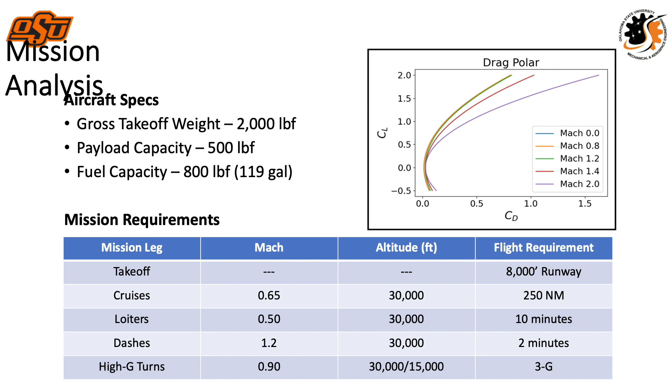To start the design process, certain criteria were pulled from the RFI. This consisted of the gross takeoff weight, payload capacity, fuel capacity, and more. For the mission legs, Mach numbers, altitudes, and durations were given. A drag polar was also assumed to calculate values such as required thrust and fuel burned. The proposed NGAT design was created in the attempt to complete the mission profile, which can be seen here.

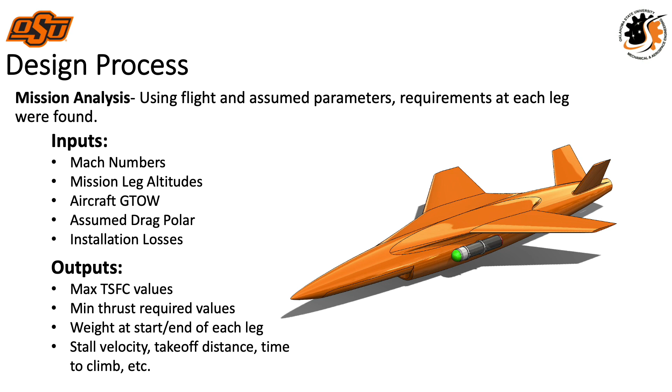To start the design process, a mission analysis was performed. This entailed finding important values for each leg, such as thrust-specific fuel consumption, minimum required thrust, and aircraft weight by using requested flight parameters and an assumed drag polar. A parametric cycle analysis was then used to compare different levels of technology for engines as well as engine design parameters and the figures of merit associated with them.

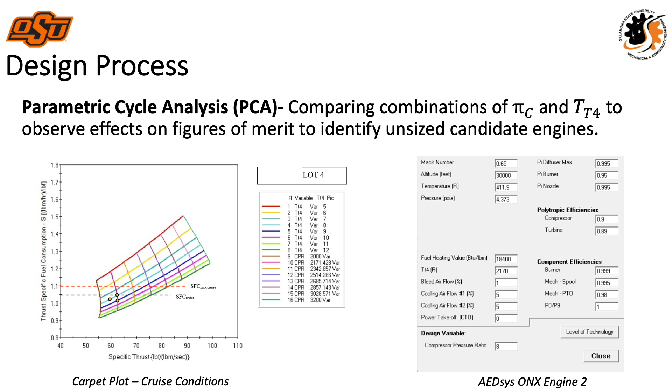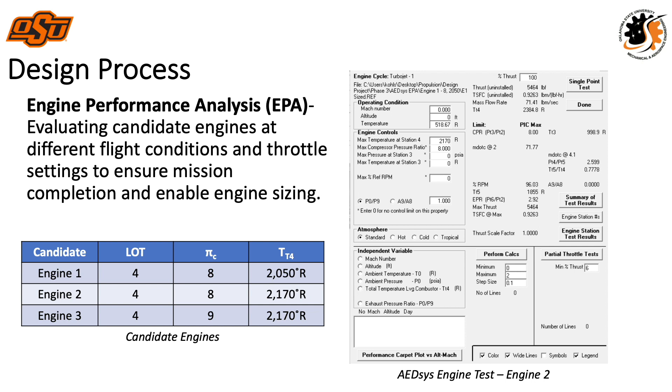By comparing carpet plots at different levels of technology, a level of technology of 4 was chosen, which incorporates modern-day technology. From this PCA and the carpet plot seen here, 3 candidate engines were chosen to move forward with. The design choices of Pi-C and TT4 for candidate engines 1, 2, and 3 from the PCA can be seen in the table here. EPA was used to look at how the candidate engines performed at different flight conditions and throttle settings, as well as to size the engines. The performance of each engine was taken into consideration when choosing the final design.

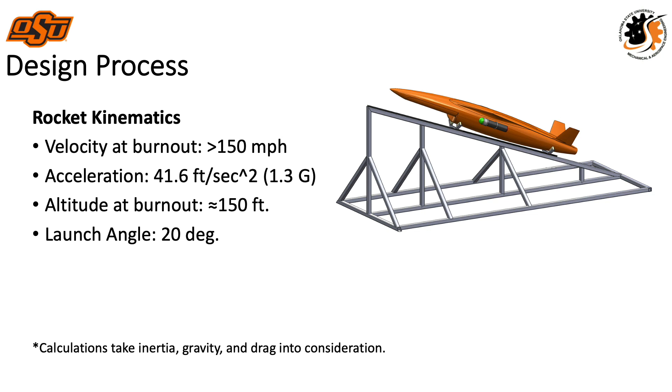Kinematics was used with the given requirements to find velocity at burnout, acceleration, altitude at burnout, and launch angle. The calculated values can be seen here. The chosen engine was determined by how the engine performed in EPA while considering any implications. Engine 2 was chosen based on a few parameters. It was smaller than Engine 1, which means less weight and easier integration into the airframe. The other factor driving the decision was thrust-specific fuel consumption. The decrease in TSFC from increasing the Pi-C from 8 to 9 in Engine 3 is negligible and was determined to not be worth the added complexity in manufacturing.

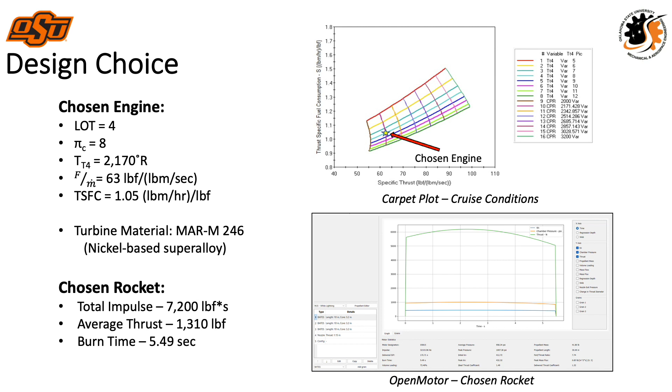The rocket chosen was based on OpenMotor simulations. The final choice was a neutral thrust curve that had an average thrust of 1,310 pound-force over roughly 5.5 seconds with a total impulse of 7,200 pound-force seconds. When selecting an engine, the team had to weigh both cost and complexity against performance. It was decided to use a level of technology of 4 because the performance gain going to a level of technology of 5 was not enough to justify the cost and complexity of the engine.

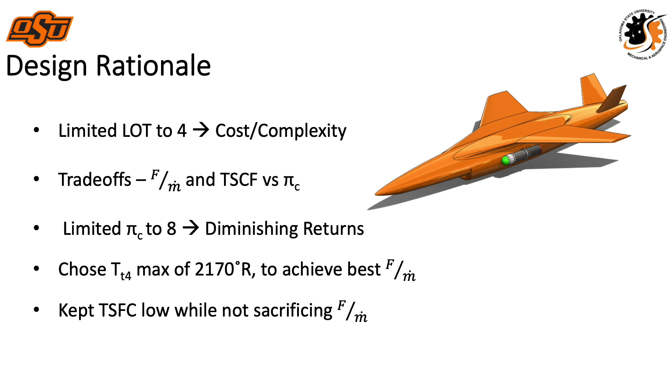Trade-offs of TSFC and specific thrust also had to be considered. The trade-offs of specific thrust and TSFC with the compressor ratio helped thrust and fuel efficiency as the compressor ratio went higher and limited the engine at a ratio of 8 because the benefits were becoming minimal. The goal of the engine was to have a low TSFC without sacrificing much specific thrust. Using the specific thrust at each mission leg, mass flow rate was calculated. The maximum required was at the dash leg with an uncorrected mass flow rate of 33 pound-mass per second and corrected of 55.9. This corrected mass flow rate led to a required engine diameter of 14.7 inches.

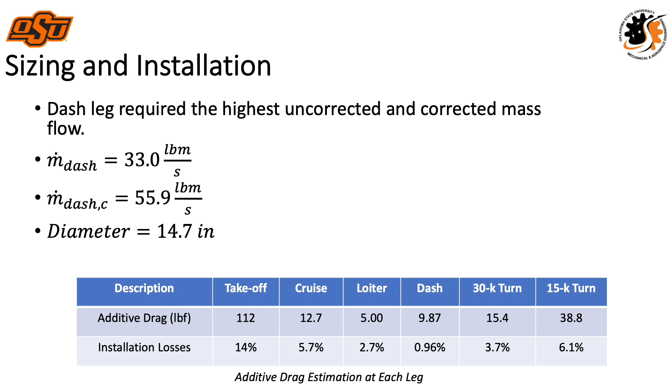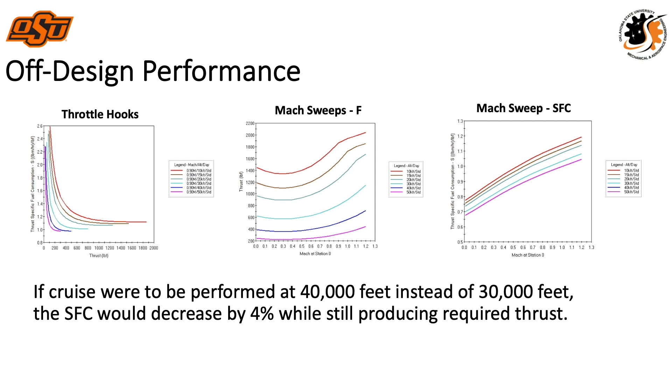The solid rocket motor design was created using requirements based on inertia, weight, drag, and kinematics discussed previously. OpenMotor was used to estimate the specifics of the motor design. The final design delivers a total impulse of approximately 7,200 pound-force seconds in 5.5 seconds using 3 10-inch BATES grains. The fully assembled weight of the motor is approximately 75 pounds, consisting of 42 pounds of propellant. A roughly neutral thrust curve was desired to produce a more uniform thrust throughout the burn.

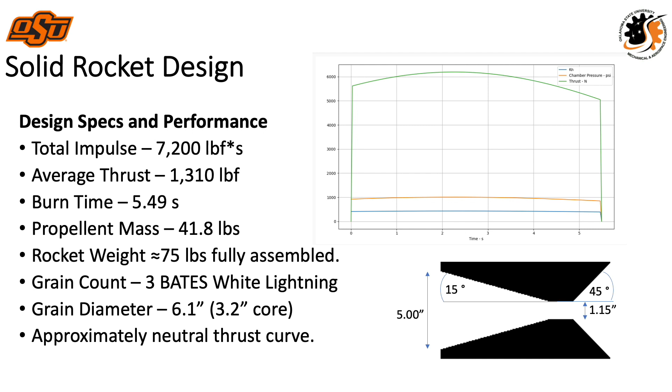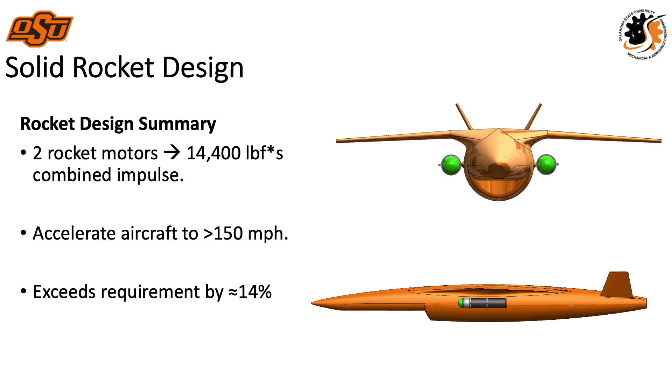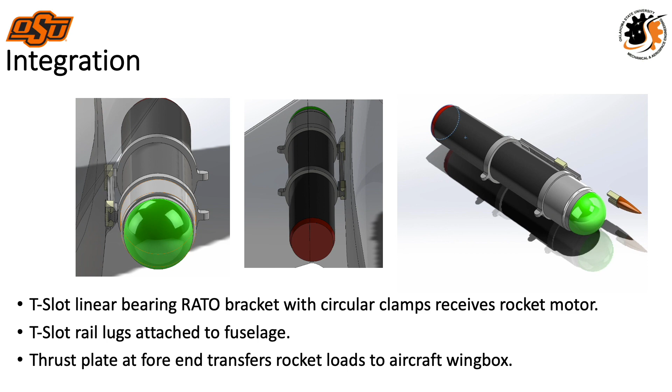The two rocket motors together produce over 14,400 pound-force seconds of total impulse to accelerate the vehicle in excess of 150 miles per hour, exceeding the design requirement by approximately 14%. The rocket was mounted to the aircraft using T-slot linear bearings. This allows the rocket to fall away upon burnout. There will be a thrust plate in front of the forward lug on the plane that will transfer the thrust into the wing box. The aircraft and launch rail integration can be seen here, as well as the rocket being installed on the aircraft.

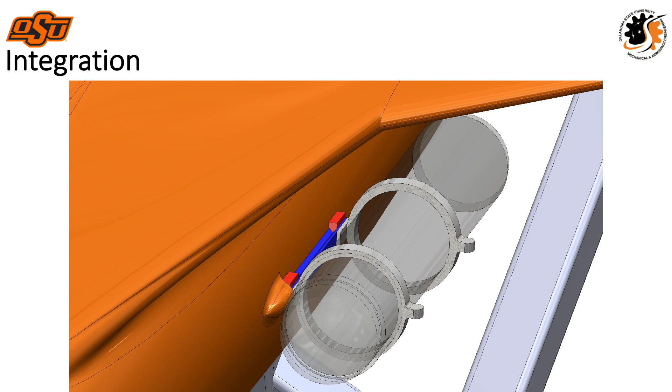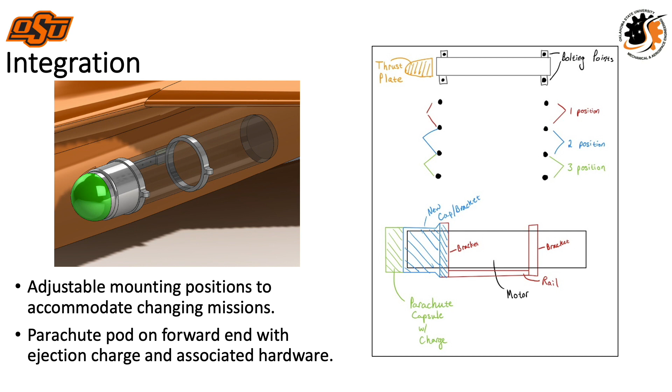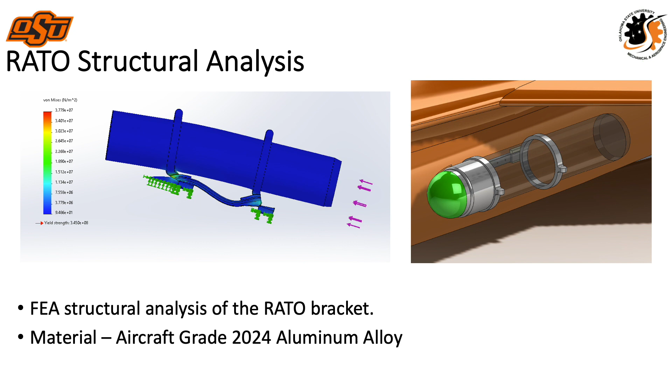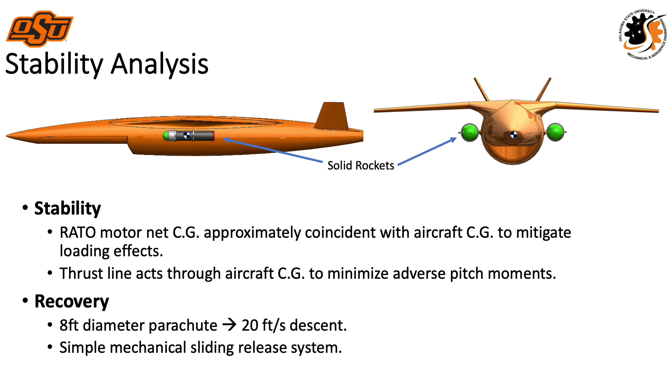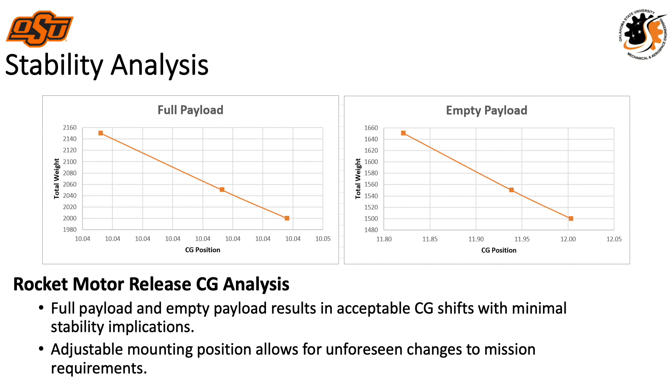Regarding RATO stability, the rockets will be placed on the approximate vertical CG location using the variable position mounting system, ensuring that the thrust line acts through the CG to avoid adverse pitching moments. Additionally, the recovery will be enabled by an 8-foot parachute and mechanical sliding release mechanism. Concerning longitudinal changes in CG position as the rocket motor burns and subsequently releases from the aircraft, the shift in CG is well within acceptable limits, moving less than an inch in both full and empty payload configurations.

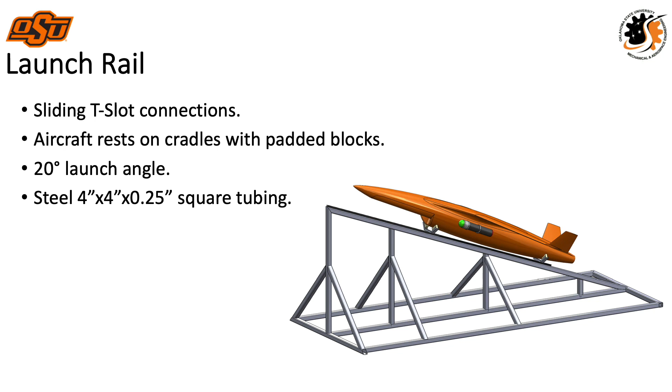The RATO launch rail is made of 4-inch square tubing that is 1/4 inch thick. It is set up at a 20-degree launch angle with 2 cradles to hold the rocket and slide into the T-slot channel. There's a stop at the end of the rail to keep the cradles from sliding off the end of the rail at takeoff. A shear pin is used to ensure both rockets fire before takeoff. The launch sequence will begin with the vehicle stationary and the launch rail supported by 2 cradles, then we'll proceed to take off and detach the rocket engines for recovery.

Thank you for watching. This has been Team 8's design presentation for a next generation aerial target with RATO capabilities.